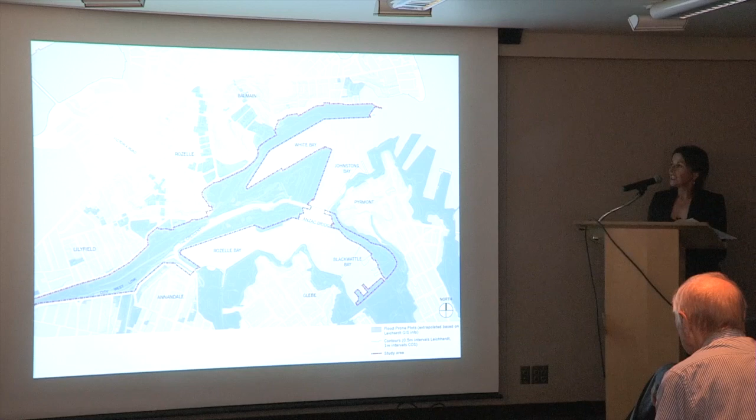Interestingly, over 20 years, I've shaped more major sites around Sydney Harbour than most and have a deep understanding of this unique place, its attributes, its issues, and its challenges.

In the wake of major storm events such as Sandy, Katrina, and tsunamis around the world, the long-term viability of our harbour cities and coastal settlements has really come into focus.

The sea level rise in our region is predicted to be up to 0.5 metre by 2050 and more than 1 metre by 2100. Our coast is equally vulnerable to the effects of climate change from more frequent storms, exacerbating inundation, flooding, erosion and seawater impacts.

There are many challenges, and here are a few I've been grappling with: uncertainty in sea level rise projections and storm events, mitigation of extreme storms, protection of our vulnerable assets including our cultural icons, reconfiguration of the shorelines and open spaces, management and enhancement of foreshore ecosystems, retrofitting and adaptation, and designing new types of adaptable buildings and structures.

But of course, there's also governance issues like silo-based institutions and problem solving that lack coordination and inhibit climate-responsive approaches, and short-term crisis management as opposed to proactive long-term planning and preparedness. In total, there's a lack of strategic leadership and coordination across agencies, and this really hinders integrated outcomes.

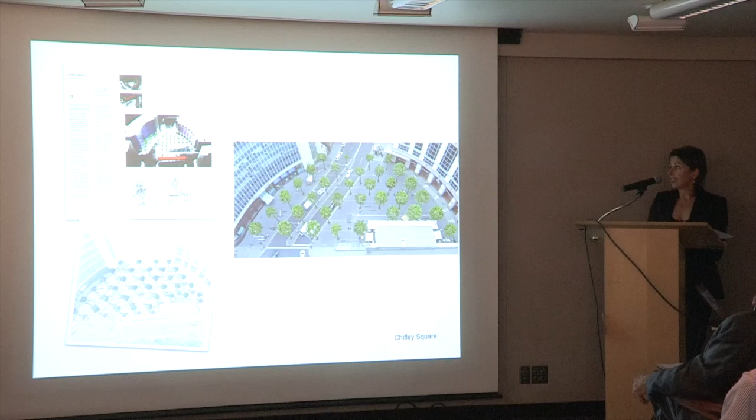Government, as a builder of urban environments, can lead by example to promote sustainability, and often we have the mandate to drive it by fostering teams of engineers, architects, urban and landscape designers working together to create more sustainable projects. These we profiled in the ESD book.

This is Victoria Park in Sydney, an old derelict racecourse—I actually have a specialty in racecourses, as it turns out—which was redeveloped for a new urban neighbourhood. The urban layout of this flood-prone site was driven by water management and flow. All stormwater is filtered, detained and reused within the public domain. We even designed proprietary leaky gutters, so all the road water runoff goes into the swale in the centre line. This is a nationally award-winning project.

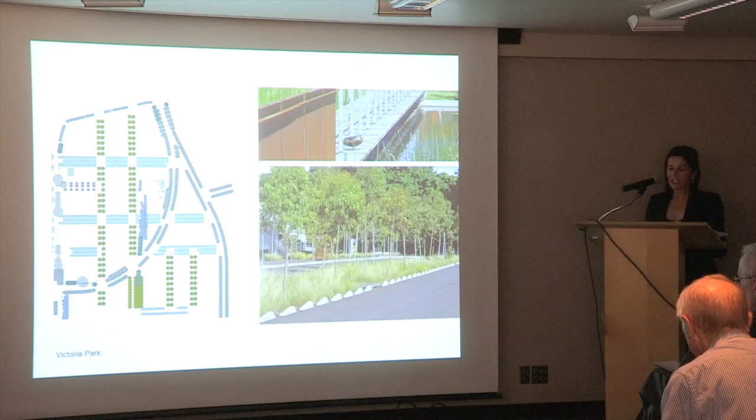For Sydney's second city, Parramatta, we worked with Council to instigate an international call to designers that yielded Design Parramatta, a compendium of new ideas for the city, based on my Sydney Spaces project. Our design team proposed a larger strategy to address water management and heat island impacts, as well as enhance the recreation experience.

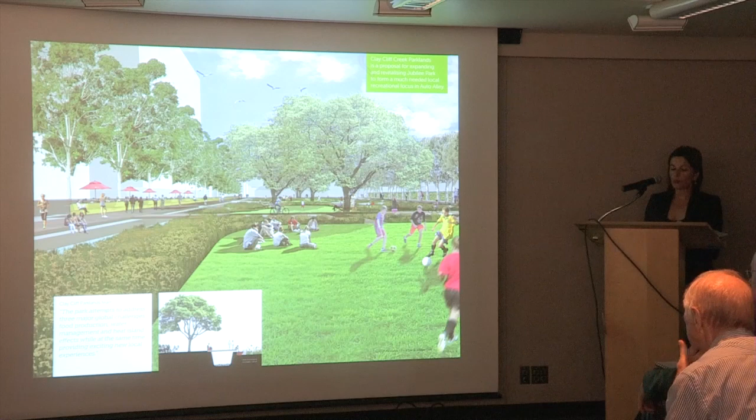The next category of work I'd like to talk about is strategic planning at a broader scale: creating a vision, structuring development, and laying out the public domain to achieve integrated outcomes that equal more than the sum of the parts.

The Sydney Olympic Park is 400 hectares of remediated landfill, very similar in nature and background to Fresh Kills. It was designed for a 16-day event, and our challenge post-Olympics was to retrofit and revitalise the site for the future. Here is the Olympic site, with at least 230 hectares of parkland surrounding it, built on remediated landfill and extensive wetlands.

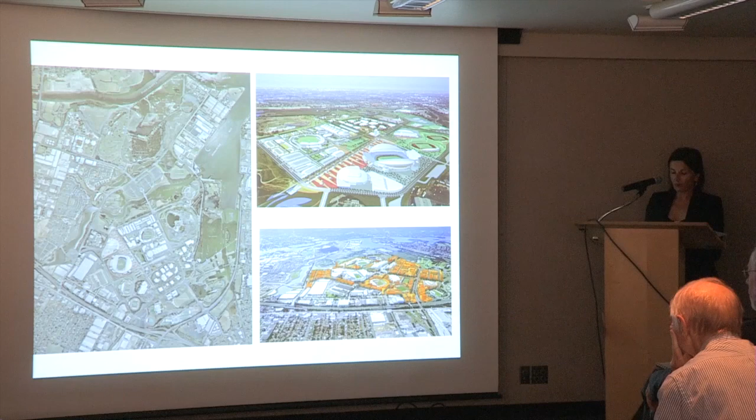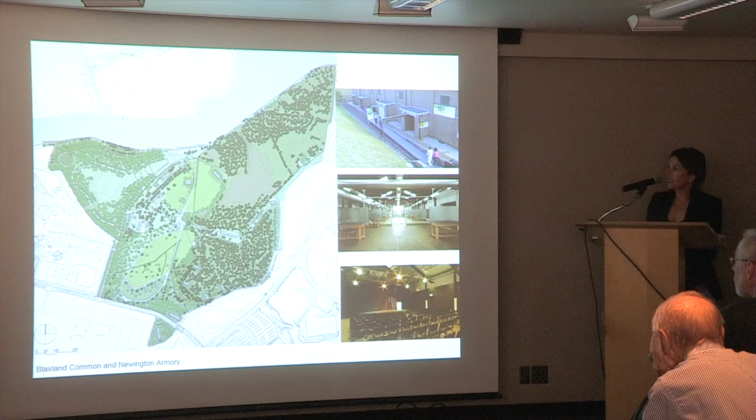We developed new development guidelines and new parks and structures that enhanced and protected the fragile ecologies and water system, such as the Newington Armoury and Brick Pit Ring projects. This was an old armaments depot where we tried to reinstate the natural systems while adapting and reusing the existing army buildings for community purposes and studios.

Here is this extraordinary project, the Brick Pit Ring project, eventually designed by Durbach Block. The interpretation and connection had to be elevated out of the water reservoir and now has created an interpretive walk which allows you to understand the history and ecology of the place and reconnects it with the surrounding parkland.

Quite an amazing experience. The post-Olympic master plan is transforming this major events precinct into a 24/7 mixed-use community with higher environmental credentials than were achieved during the 2000 Games, through very tough bargaining with our board.

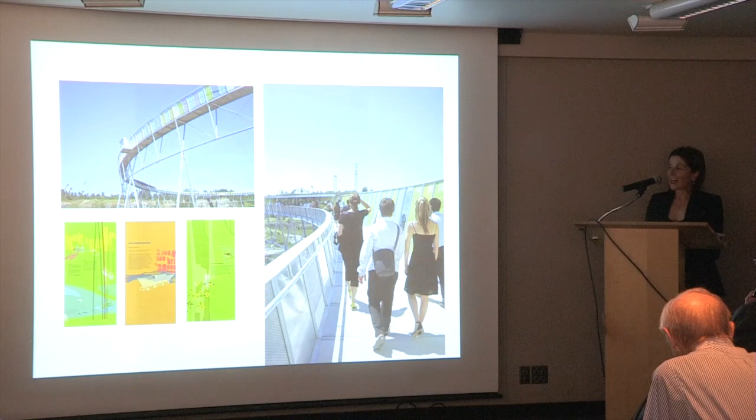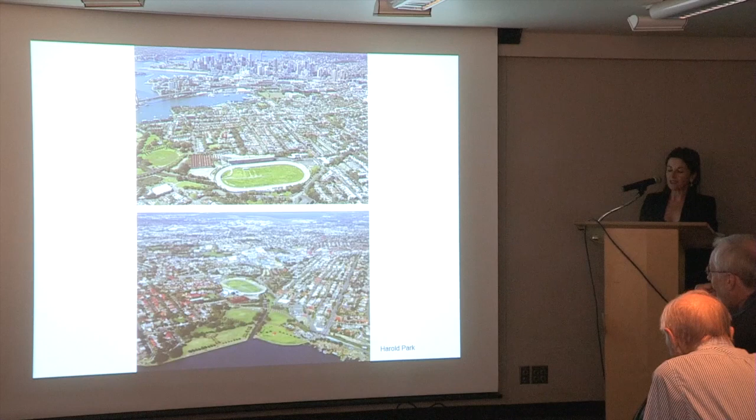At Harold Park, another raceway, we worked with the city and the landowners to replace a redundant racetrack with a new high-density neighbourhood now under construction. With over 1,000 new dwellings, including 25% affordable housing, the project maintains 35% open space, improves the hydrology and biodiversity of this flood-prone land, and also achieves high environmental targets.

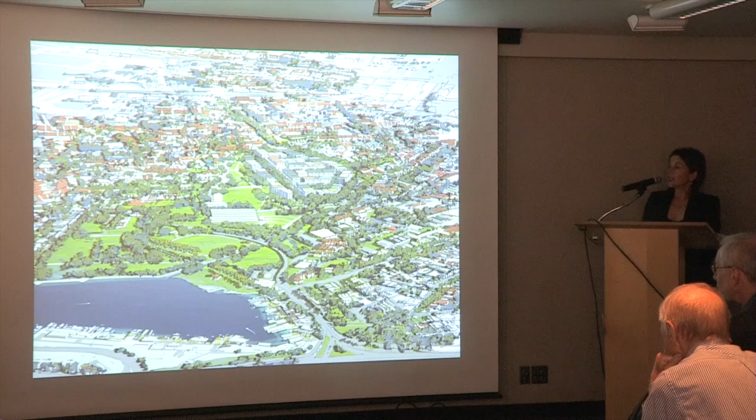Lastly, I want to talk about strategic projects, where we have the capacity to work at different scales and implement initiatives that will be delivered over time by different players. My most recent work was at Circular Quay, the birthplace of Sydney, framed by Sydney's iconic Harbour Bridge and Sydney Opera House.

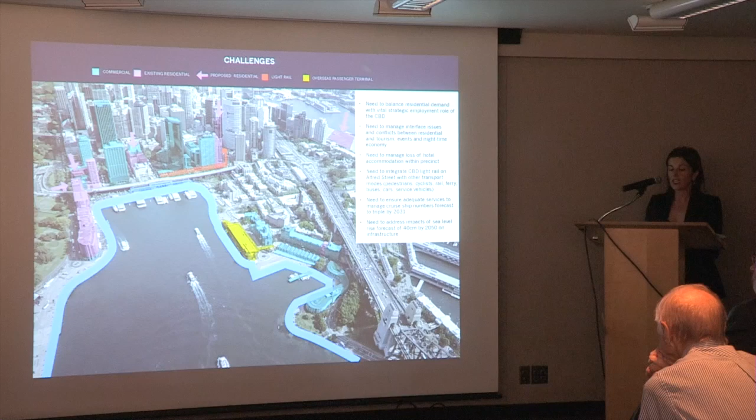But it has many issues: stressed and aged infrastructure, development pressures, siloed decision-making, and last but not least, sea level rise and its consequent impacts. However, the opportunity is extraordinary because there's a huge number of projects planned or in the pipeline in this precinct, as you can see.

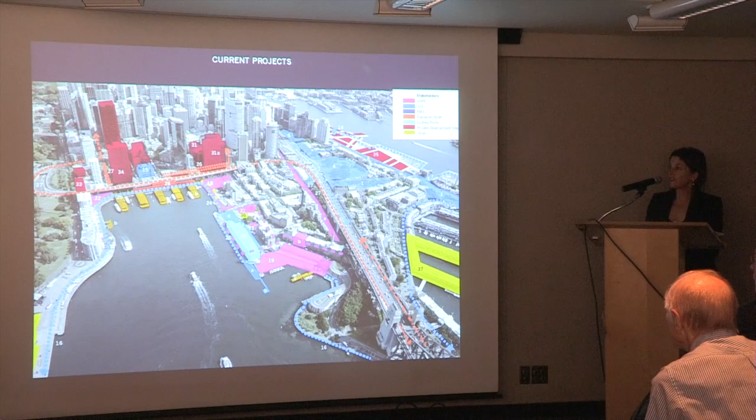The opportunity for me was extraordinary because of the consolidated land ownership in the precinct, with all those blue areas in government ownership of one agency or another. So working together, we can actually do something much bigger than the sum of the parts.

The Circular Quay Master Plan is a 30-year strategy for a staged transformation of Sydney Cove. The Master Plan reconnects the city with the harbour and proposes a greener quay by removing the elevated expressway, undergrounding the rail, and recapturing 30% more open space for pedestrians along a new waterfront promenade designed to accommodate the projected sea level rise and storm surge.

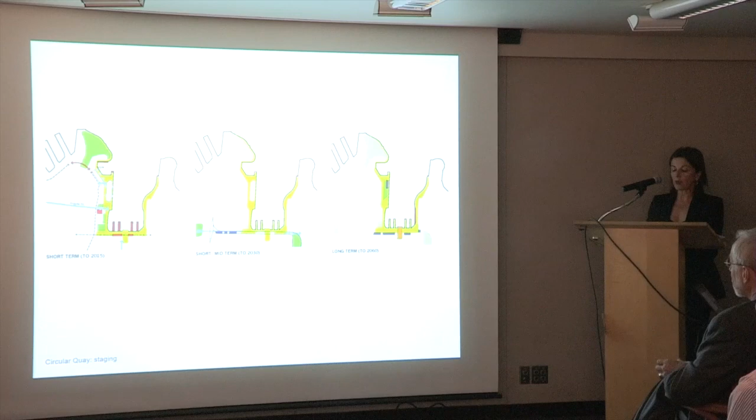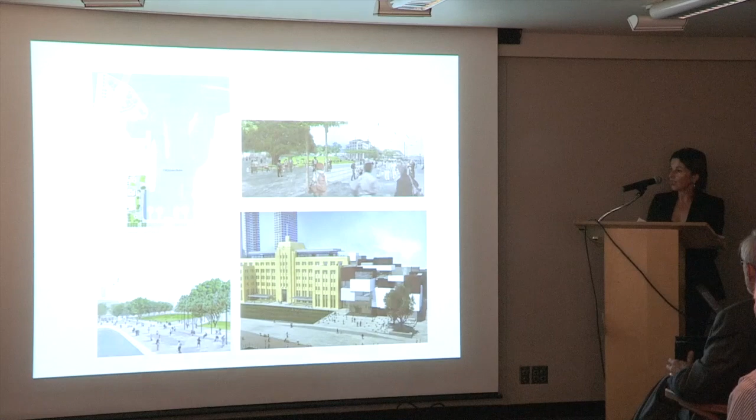The plan is designed to be implemented over time with projects by both public and private sector. We have already completed a piece of the waterfront at West Circular Quay in front of the new Museum of Contemporary Art, which is shown here. While at Walsh Bay, a new cultural precinct will transform the wharves and reconnect the quay to Darling Harbour—much more of an adaptive reuse project.

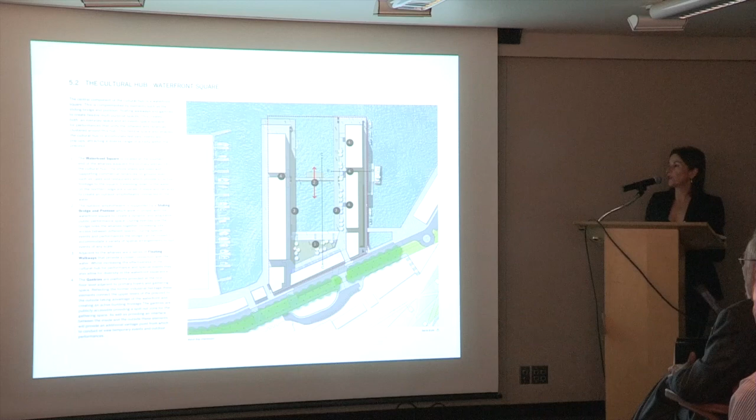So, ultimately, what would I like to accomplish this year? I recognise the value of working within government to effect changes beyond the project scale. However, I also realise the limitations. Developing a broader perspective this year will not only better equip me for my current and future challenges, but also better position me to transition into new roles where I can facilitate more integrated approaches to the design and management of our coastal settlements. I'd like to return to my professional life with an enhanced skill set.

Besides refined critical thinking and a substantial research base, I'd like to really have under my belt new approaches to resilience planning that maximise co-benefits and the ability to translate these into action. I'd like to work on my enhanced leadership capabilities to effect change and, of course, develop new networks, both academic and professional. If I could do some of these, they would be great achievements. In any event, the Loeb Fellowship is a once-in-a-lifetime opportunity, and I'm very keen to be here to embrace it. Thank you.